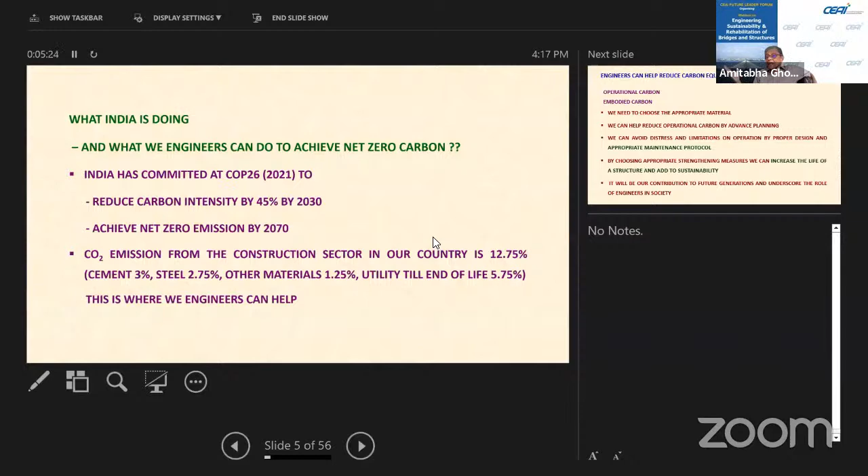In the construction field, we all know that the construction sector in our country contributes 12.75% of the carbon emission. You can see the breakup. And at least we engineers should be able to help in this area.

How can engineers help? We can help by reducing operational carbon and embodied carbon. Embodied carbon is which goes during the manufacture. Operational carbon is the carbon consumption during the utilization of the facilities. Now, to achieve this, we have got to choose a material which will have less embodied carbon. We have to plan such that the operational carbon, or consumption and emission of carbon dioxide, is reduced by better utilization of the facilities.

We can avoid distress and limitations on operation by proper design and, more importantly, the appropriate maintenance protocol. We make something, we design something, but we don't guide how to maintain it. What are the importance of maintenance? It is, after all, we engineers who are responsible to ensure that the structure we build is properly maintained. And then, when a structure shows signs of deterioration, it is we engineers who can increase the life of a structure and add to its sustainability.

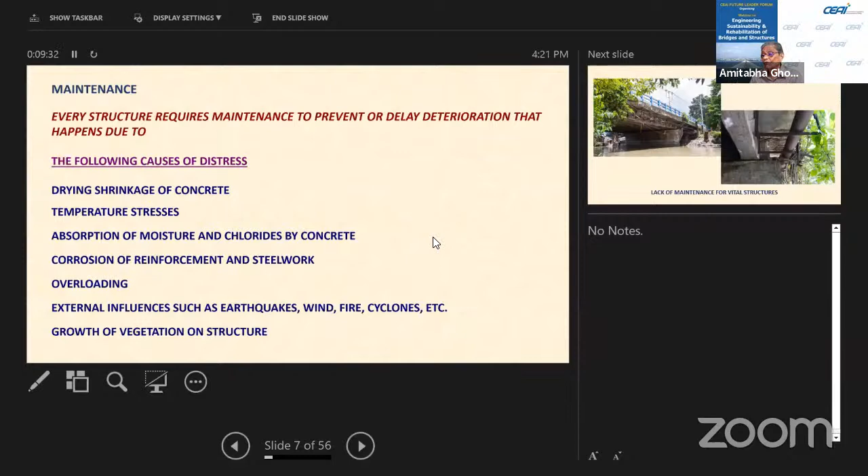What you are looking at is a running bridge. People are crossing. All types of transportation vehicles, including passenger vehicles and goods vehicles, are running over it. And people are very happy it's a good bridge and it is providing them means for transportation. But hardly anybody goes underneath the bridge. And if you look underneath, look at the vegetation on the right-hand picture.

You can see that the pipeline is being supported on the stem of a peepal tree which has grown through cracks in the structure - some seeds have dropped and a tree has grown, and nobody is taking care of it. In the process, it is not only corroding the structures, it is also causing spalling of concrete, exposing the reinforcement.

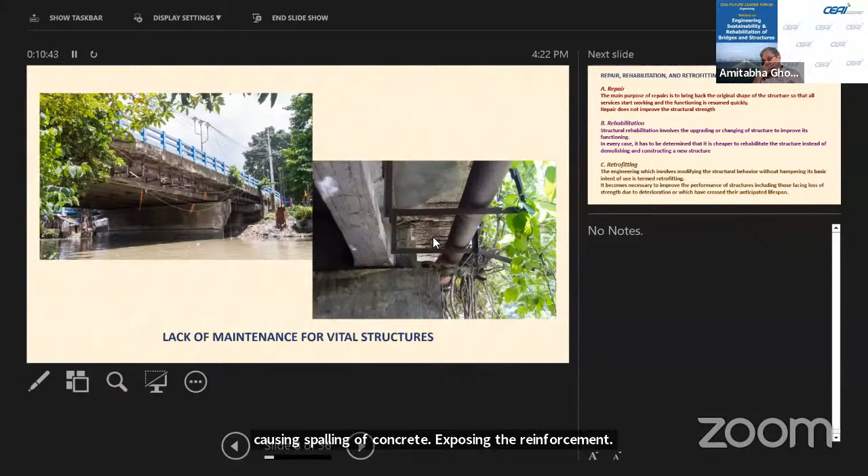And you can see people living in the left-hand picture. There are people living under the bridge. They are having their day-to-day course there - they are cooking there, they are putting fire there. And all that is deteriorating a structure which we have built for 100 years, and which we expect to survive for 100 years. But how can it survive if we do not take responsibility for its maintenance?

Now, in terms of recovery or strengthening of a structure, there are three stages which we talk of. One is repair. When we find that a structure has deteriorated, we try to repair it, to bring it back to its original shape and original strength, so that its functioning is not impaired. Repair is not for improving the structural strength, but for bringing it back to its original design situation.

Now, the other thing is rehabilitation. When we find that normal repair would not do for it, you have got to upgrade or change the structure to bring back its original functioning. But when we do a rehabilitation, we have got to be sure that the rehabilitation measures will not be costlier than building a new structure.

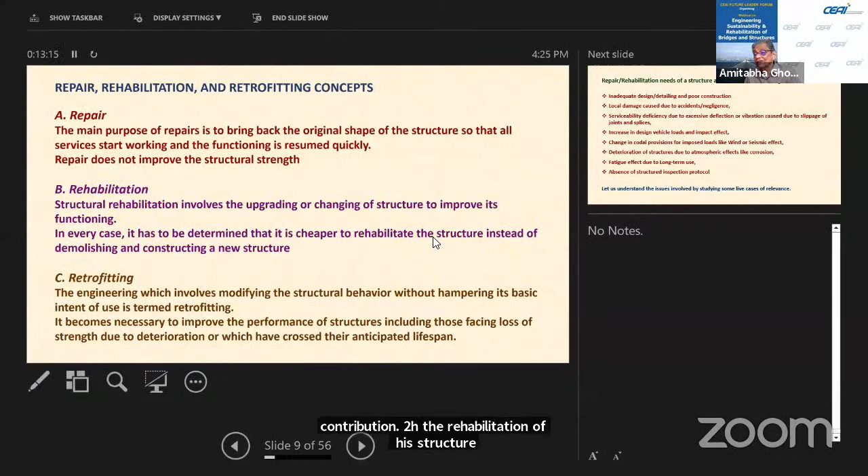Now, all these are the engineer's contribution towards the rehabilitation of a structure. And it is that by which we can contribute towards sustainability. I shall try to share with you what are the reasons for these needs for repair, rehabilitation, or retrofit.

One, it could be inadequate design or detailing and poor construction, even when the structure is made. It is not unusual with our tendering system, our emphasis on least cost, that people willingly or unwillingly try to keep the structure under-designed. And with quality of construction being sacrificed, it can ultimately cause deterioration of a structure.

Then there is local damage, which can be caused due to accident, negligence, or some sort of unexpected happening. There is serviceability deficiency in a structure due to excessive deflection or vibration, caused by slippage of the joints and splices. It gradually starts vibrating and people become scared of using the structure, so they underuse it and thereby reduce its effectiveness.

There could be an increase in design vehicle loads, as I was mentioning. There is improvement in the automobile industry, and they are making vehicles carry more load, making it more economical. But they naturally cannot think about the structures. It is our responsibility to check whether the structure we have built, the structure giving us service today, will still be safe or unsafe. And we should know about the impact. Very often there's a bump in a structure that gives more impact, and continuous application of such impact impairs the load carrying capacity of a structure.

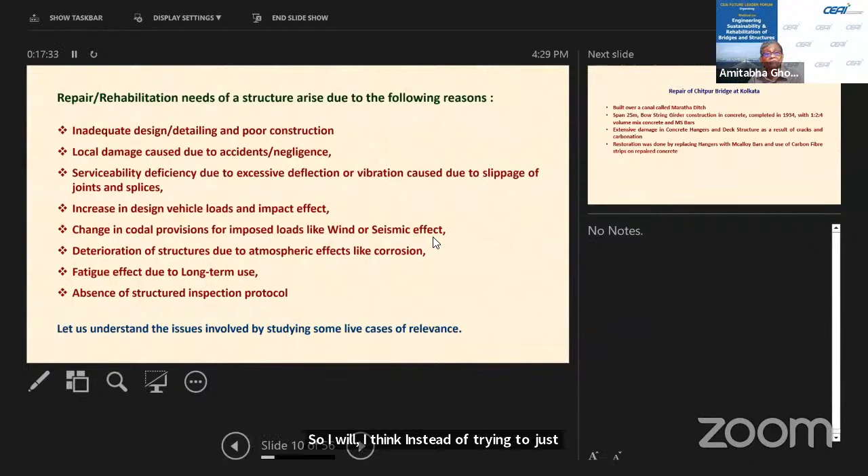We would try to understand, and I would try to share with you my understanding of these issues through some case studies: one involving repair, another involving rehabilitation, and the third involving retrofitting. So instead of just lecturing with dry facts, let us share some of our experiences.

The first one I am going to talk about is involved in the eastern region, in the city where I live. This was in Calcutta. There is a bowstring bridge across a canal. The canal, interestingly, is called Maratha Ditch because the Britishers had built it to keep away the Marathas, who used to come all the way from the west to maraud and loot the wealth of the people living here.

It has a 25-meter span bowstring girder, constructed in concrete, completed in 1934, with nominal mix 1 to 2 to 4 mix concrete and MS bars. We have had this structure now for almost 80, or more than that, 90 years.

This has shown some damage in the concrete hangers and deck structures, which came to light through a special inspection done of the bridge. Restoration was done by replacing the hangers with McAlloy bars and use of carbon fiber strips on repaired concrete. I'll just share the case.

As you know, the bowstring girder is one of the classical structures used for reducing the depth of the deck so that the formation level can be kept low, while still providing clearance from the underlying water. If we can keep the depth low, we require less grading in the approaches. It's a pure structure because it takes compression in the top chord and tension in the bottom chord, with very little bending in the structure. The verticals are hangers which hold the deck.

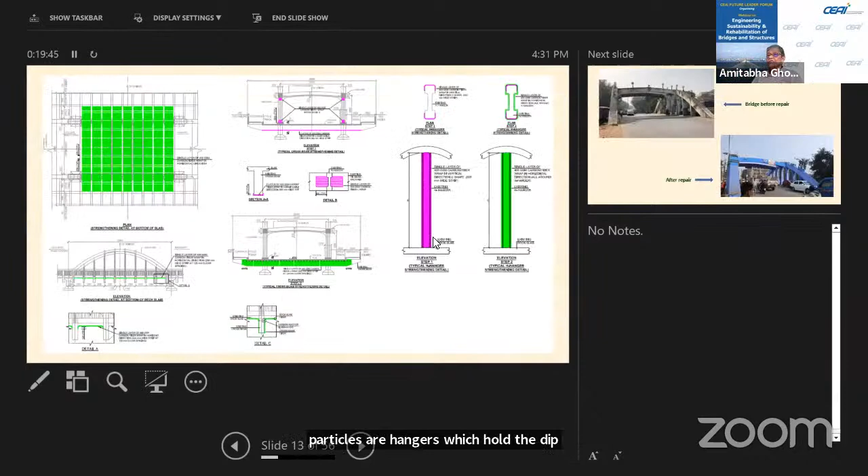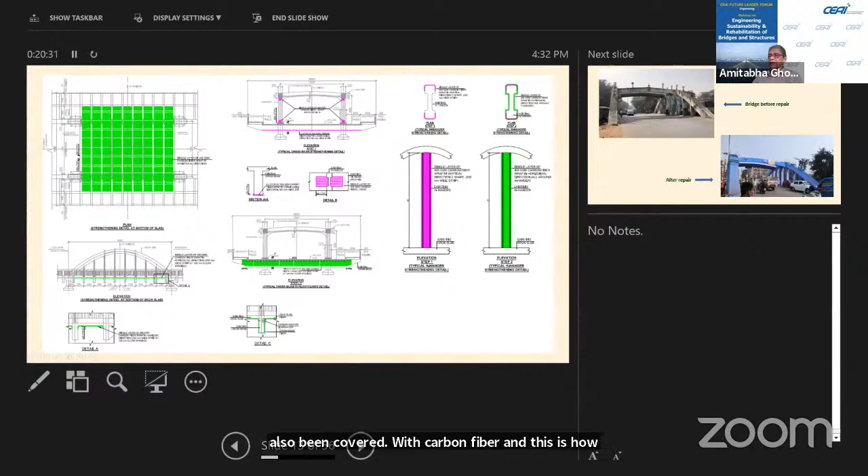Whatever is shown in green is what was proposed to be used with carbon fiber. Here we show further details. The underside of the deck has been treated with carbon fiber ultimately. On the right side, the hangers, the vertical hangers, are dumbbell shaped, and these have also been covered with carbon fiber. This is how the hanger is hanging, and the underside of the deck you can see in green here, showing the entire structure.

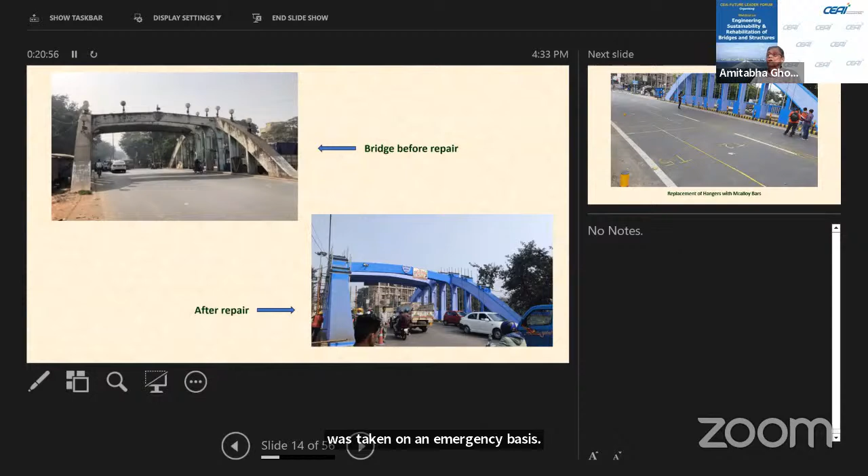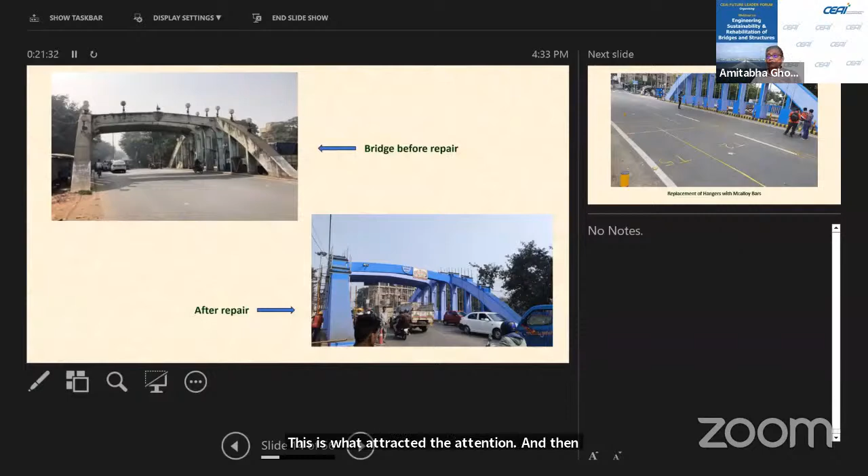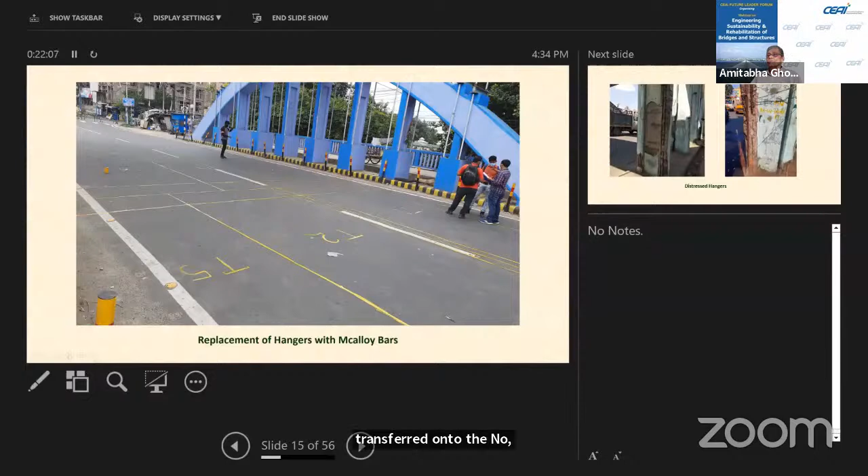And therefore there had been damage and spalling of concrete in the verticals. This is what attracted attention, and then we did inspection of the underside and took up the repair work. You can see the verticals have been replaced by McAlloy bars. Each vertical has been replaced with 4 McAlloy bars, placed on the top of the rib, such that the vertical load is transferred onto the top rib, then connected to the bottom, lifted, and fixed with nuts.

Now this is the quality of damage which was found. You can see the reinforcements are fully exposed. These are the mild steel bars, fully exposed and in a condition where they will just deteriorate, and the bridge was ready for sudden failure.

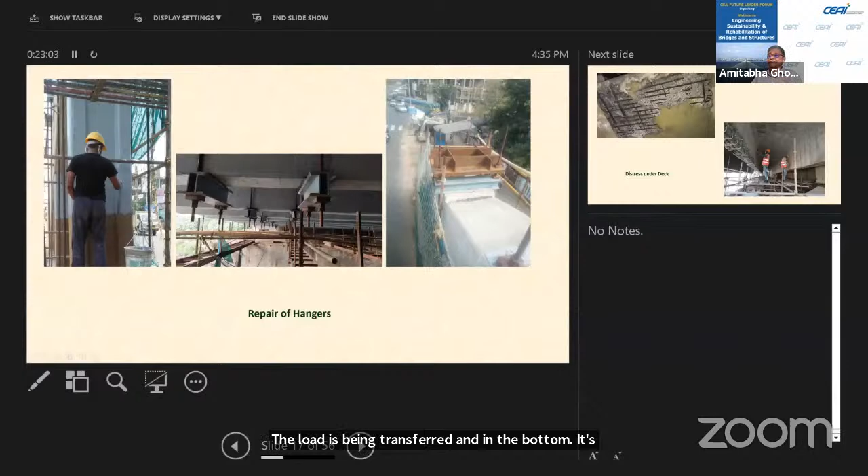This is how repair is being done with micro concrete for the damages which were there. As I said, McAlloy bars are put on the top rib arch, and with a steel plate, the load is being transferred. At the bottom, with a threading arrangement and nuts, the tension from the hangers is being transferred to the new bars which have been put in.

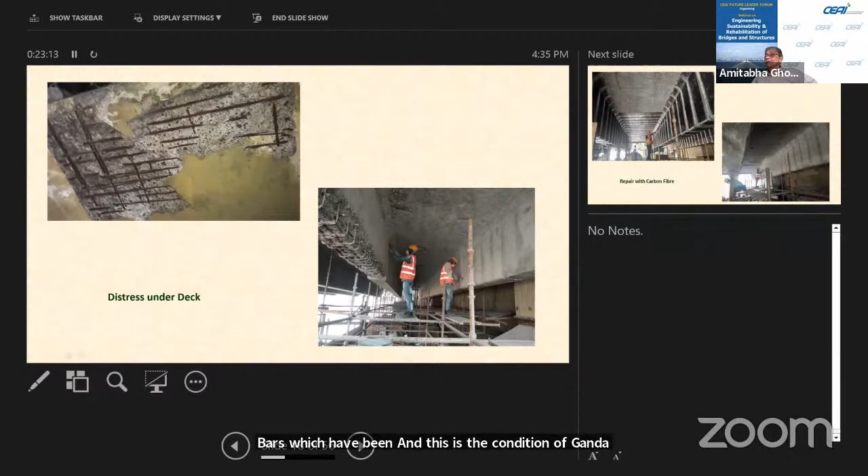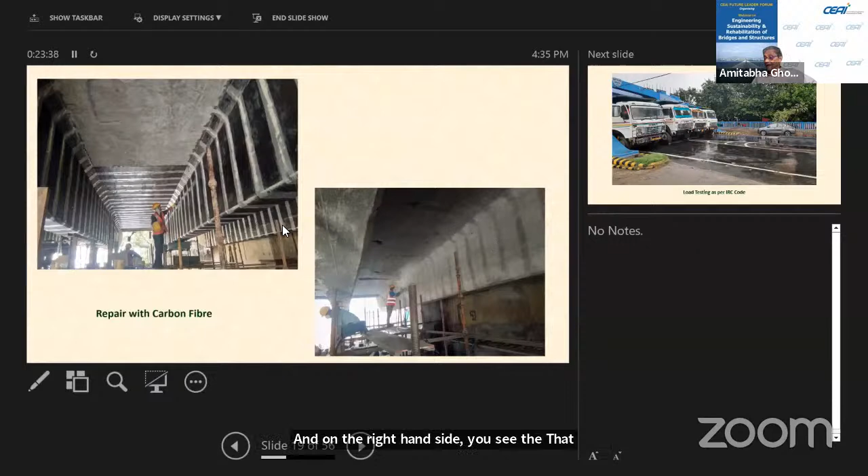This is the condition of the underside. You can see the slab bottom, the bottom of the beams of the deck, and all that had to be cleaned and new concrete put in. Then carbon fiber is being applied onto them, alternately, and then fully covered. On the right-hand side, you see the carbon fiber covered with plaster, and the repairing is complete. This is the load testing being done, and it was found to be in good shape.

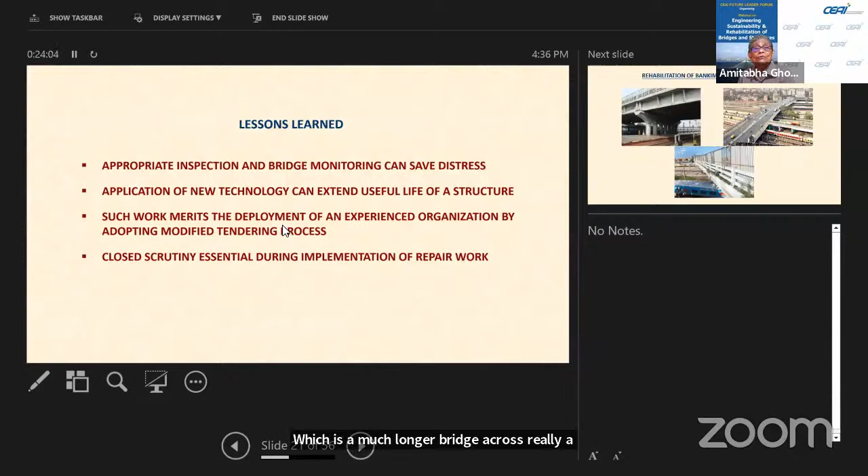The bridge was in good shape. By repairing it on an emergency basis, not only did we extend the life of this bridge, but there was a major repair going on in an upstream bridge, a much longer bridge across the railway yard, and that repair could not be taken up unless traffic could be diverted onto this bridge. It carried all the traffic and thereby allowed that other major repair to be completed.

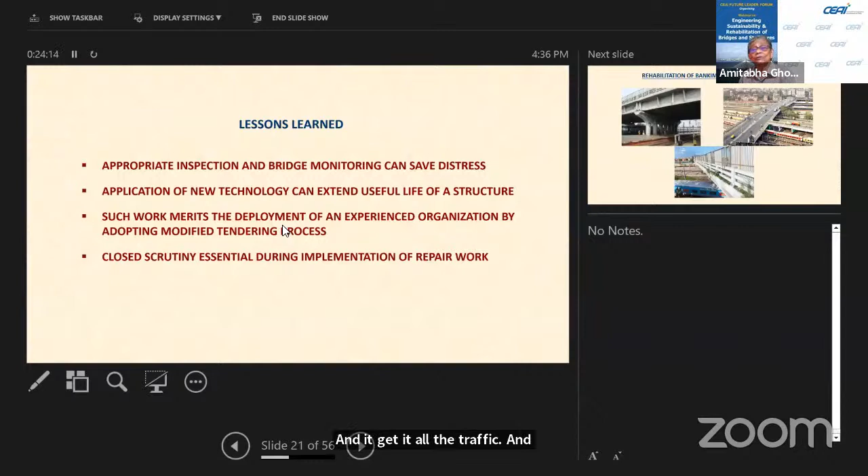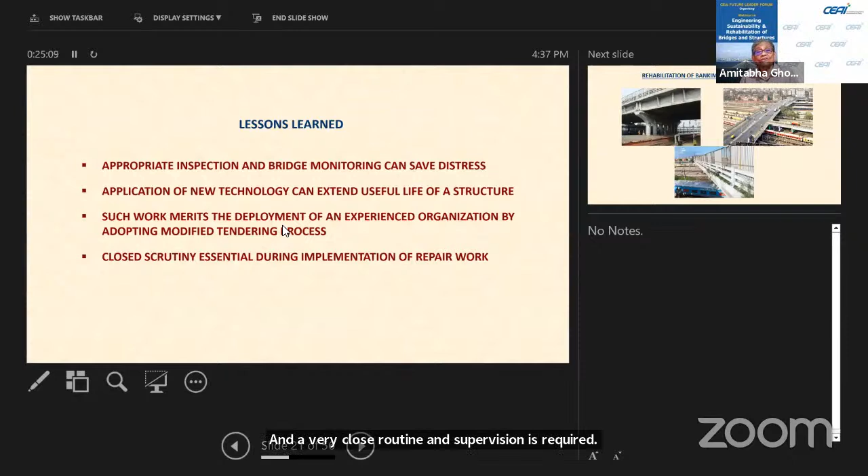Now, what are the lessons learned? As usual, appropriate inspection and bridge monitoring can save distress. A lesson we have been taught, but we have not learned. Application of new technology like carbon fiber, application of Macalloy bars, pre-tensioning them and thereby taking the load off an old structure can give it new life. But one caution: such specialist work should be done by experienced organizations, not by ordinary tendering and giving it to the lowest bidder. One should be cautious about that as an engineer, and very close scrutiny and supervision is required during implementation of the repair work. I move to the next case.

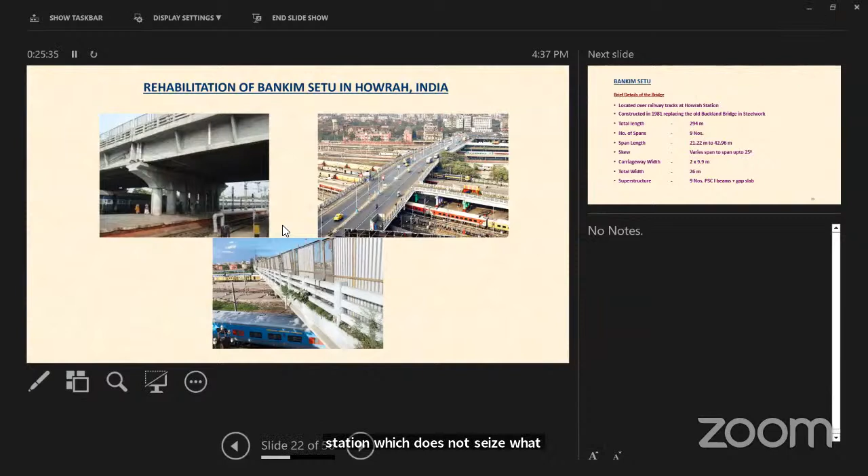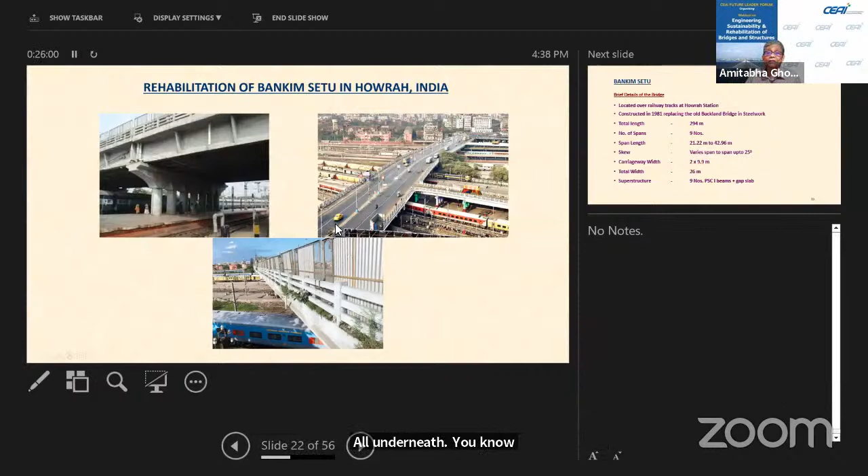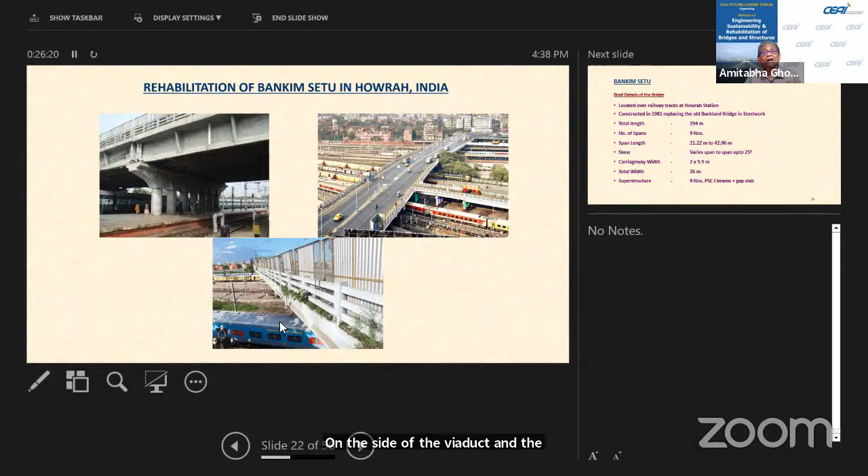It's a bridge across the Howrah station. Howrah station has more than 20, 24 platforms to be exact, and it is a station which does not cease working throughout the day. It's hardly 4 hours at night that there is respite from trains moving in and out. Since this railway track divides the city, the only link between Calcutta and Howrah is over this deck. As you can see, traffic is moving on this, and underneath you can see the trains, either stationary, loading passengers or leaving. The gap between the underside of the bridge, the viaduct, and the high tension wire which runs the electrical trains is hardly 60 centimeters. So there is no place at all for going underneath or repairing them.

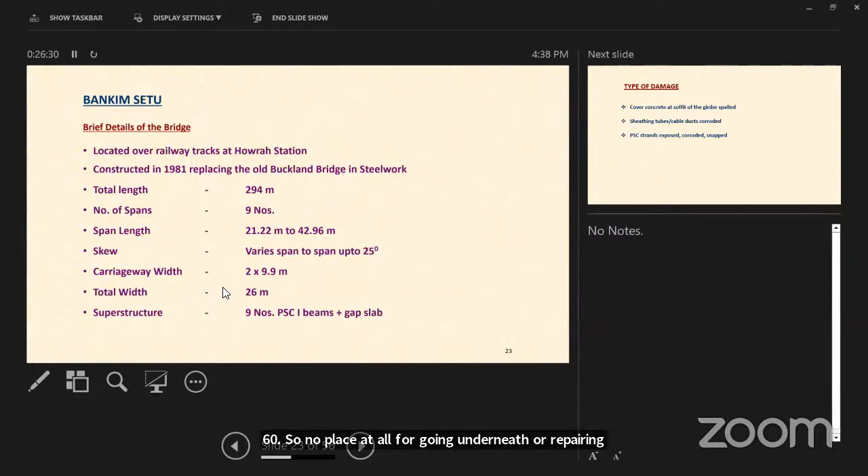Is there somebody talking? Hello? Hello? Okay.

Well, some brief particulars about the Bankim Setu, as we call it. It's about 300 meters long, 9 spans. Spans vary from 21 meters to 42 meters. The carriageway is 9.9 meters, a 6-lane carriageway. And the superstructure is composed of 9 PSC beams and a gap slab.

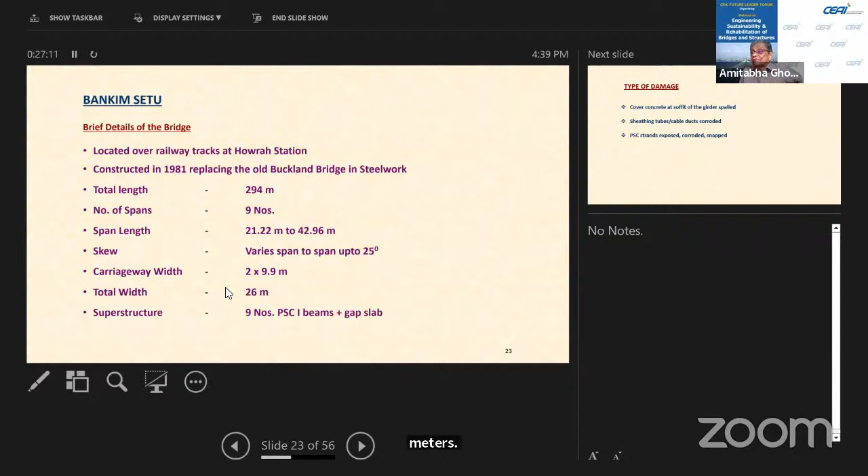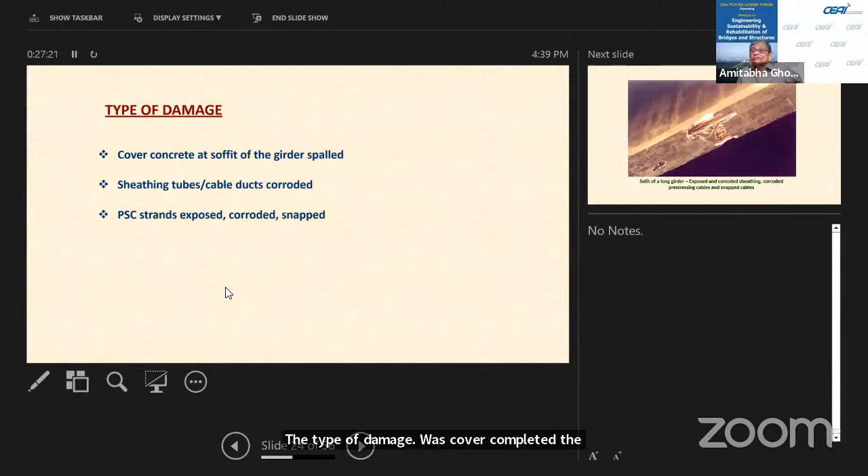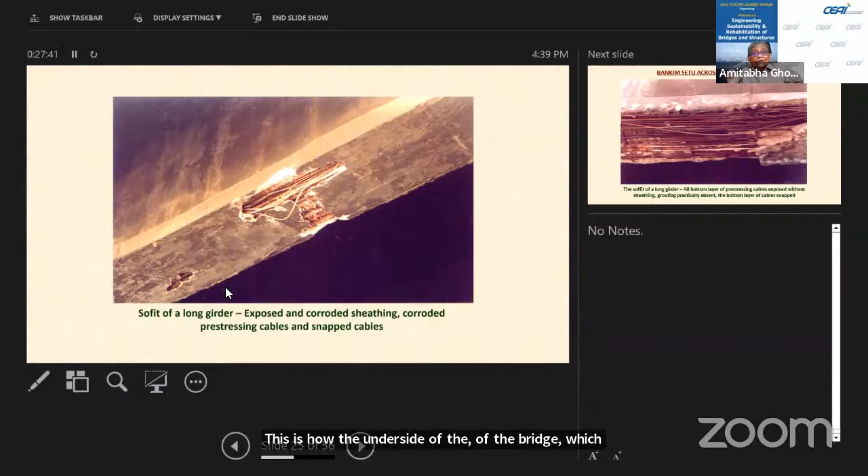The type of damage was cover concrete at the soffit of the girders had spalled. It is a PSC bridge; PSC precast girders were cast and put in place. The sheathing tubes and the cable ducts were corroded. The PSC strands were exposed, corroded, and snapped. This is how the underside of a girder of the bridge, which carries continuous traffic day and night, started. You can see the concrete is just falling off. It does not look like concrete; it looks more like plaster.

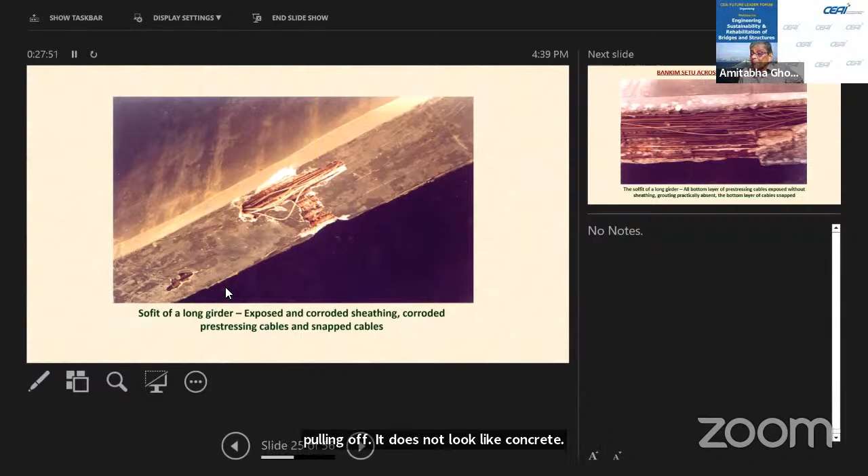And this is the next stage: all the plaster has gone away and the pre-stressing wires are hanging like this. Mind you, this is in a city where it is under the view of thousands or millions of people using the station. If they look up, they can see the condition of the girder, and still it remained like this without any repair for a very, very long time. All the bottom layer of prestressing cables are exposed without sheathing, grouting is practically absent, and the bottom layer of cable has snapped.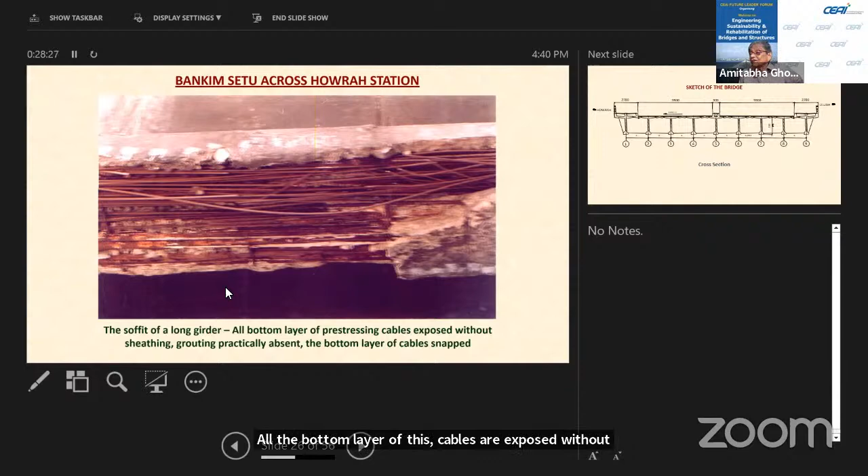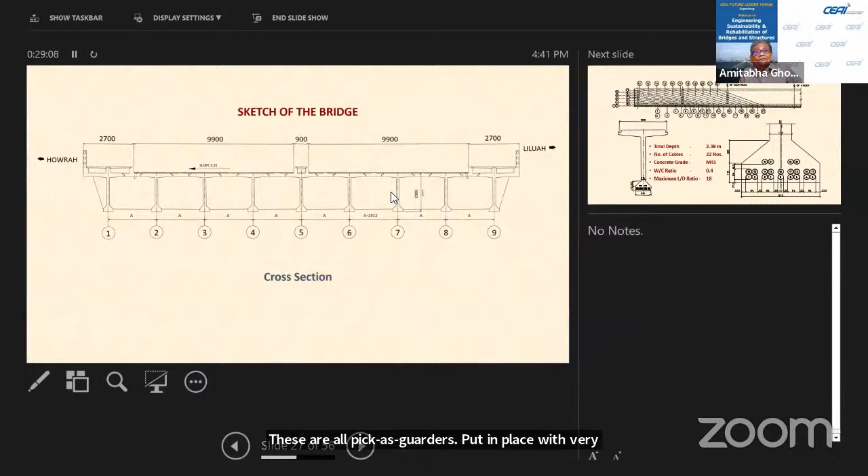I don't know how well you can see, but these are the 9 precast PSC girders with a bit of gap slab, 9 girders placed side by side, very short girders so that the formation level could be low. This is how the bridge had been designed. It's an excellent design, but the only thing is the designers did not think about the maintenance part of it. These are all precast girders put in place with very little gap between the ends of the girders, so you could never go and see the end of the girder, how the pre-stressing anchors are there. This is the cross section of the girder.

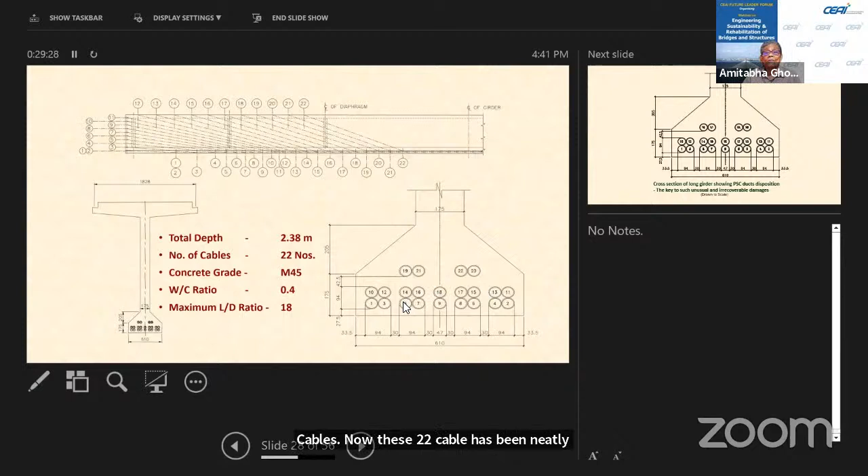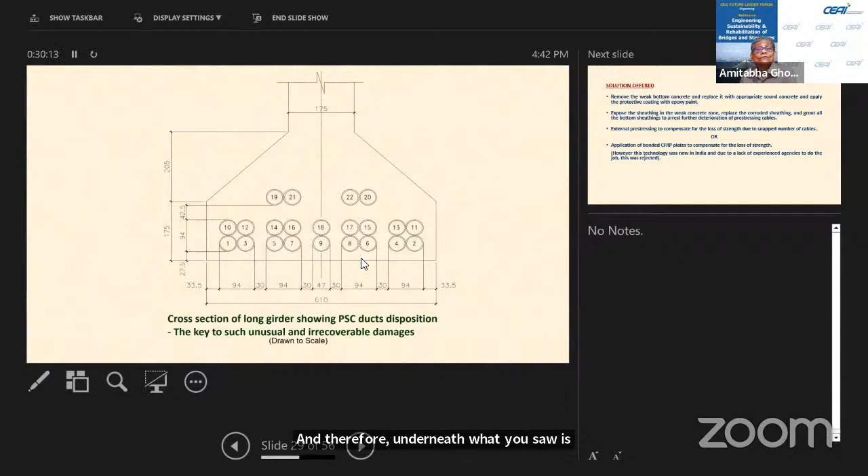You can see there are 22 cables. Now these 22 cables have been neatly arranged, but the only problem was that the gap between the cables was hardly 30 millimeters. For a girder which is almost 2 meters deep, 2.4 meters deep, the concrete is poured from the top in an encased shuttering. When the concrete reaches here with a 30 millimeter gap, the concrete does not flow. What has flowed is just the plaster, a sand cement slurry has gone in. The concrete stone chips have formed neat arches, and therefore underneath, what you saw is more of a thin layer of plaster rather than concrete. That has caused the decay of this bridge in hardly 20 years' time after it was built.

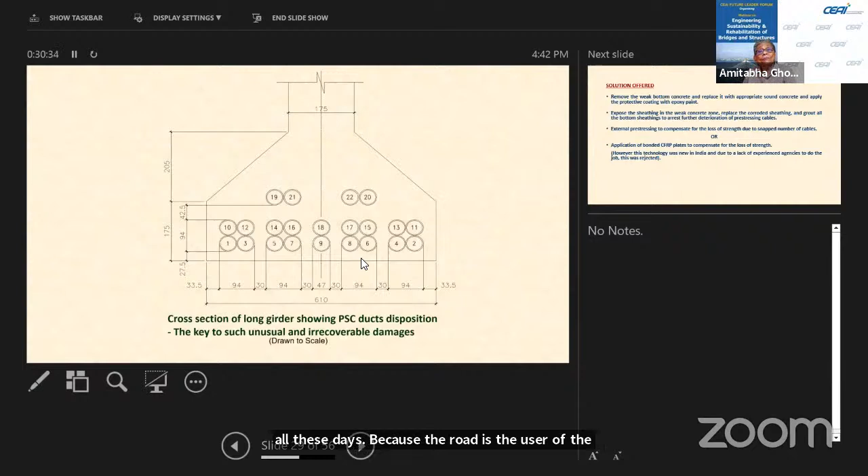And all these days, because the road was the user of the bridge and the railway was the upkeeper of the bridge, none of them looked at the condition of the girders. Now the solution which was offered was to remove the concrete, replace it with micro concrete, expose the sheathings in the weak concrete zone, replace the corroded sheathing, grout all the bottom sheathing, and then apply external pre-stressing.

The only other way was use of carbon fiber, but in those days, in 2000, carbon fiber was not that popular, nor was the technology well understood. That is why what we took recourse to is external pre-stressing.

Mind you, there are only 4 hours of stoppage time. During these 4 hours, work had to be done if you have to go underneath, because otherwise, with 25,000 volt, nobody will survive. So the repair could not be done underside very safely, and that is why external pre-stressing was done.

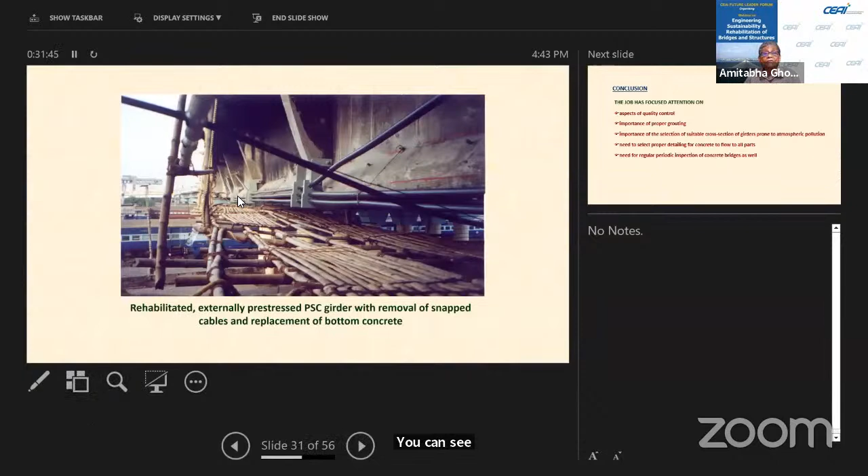You can see the pre-stressing cables which are being taken and embedded. They are being passed through steel members which have been embedded in the concrete, and through them the pre-stressing cables have been brought.

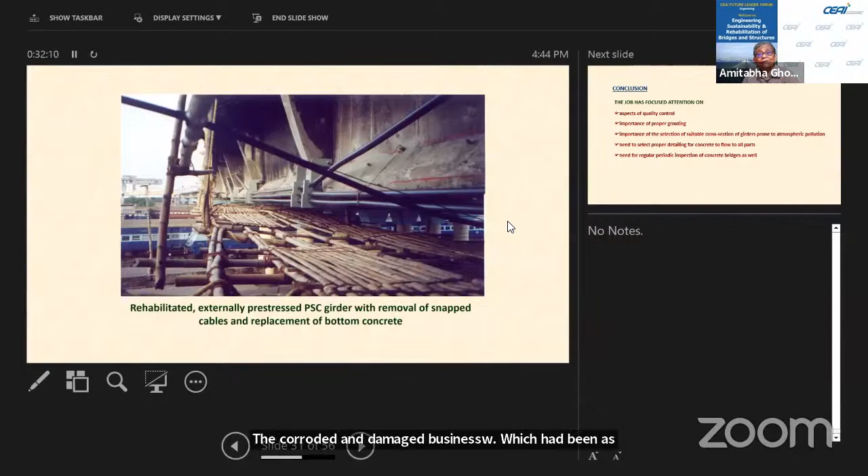They were pre-stressed to replace the corroded and damaged pre-stressed wires which had been, as you saw, converted into sort of like old electrical wires hanging. With this pre-stressing, the girders were replaced or restored, and the engineers, after doing the job, gave the assurance that with this sort of a repair, it will live for another 20 years maybe, but you have got to look for a permanent replacement.

The work was done in 2001. Now in 2023, railway has started thinking of replacing the girder with a new bridge, but it has gained a time of 23 years and delayed the new construction by 23 years. And that is our contribution to the sustainability.

The conclusion, or the awareness which came, again, quality control, which was poor. Even a wrong design is a poor quality control. Where you do not leave space for the concrete to flow is poor quality. The importance of proper grouting obviously was not emphasized.

The cross-section of the girder which had been selected, in an area which is prone to atmospheric pollution, because thousands of trains are coming in and going out, the dust and the diesel and fumes and all sorts of pollution that comes with huge movement of people were not thought of. The detailing was not proper, and unfortunately, there was no periodic inspection and reporting.

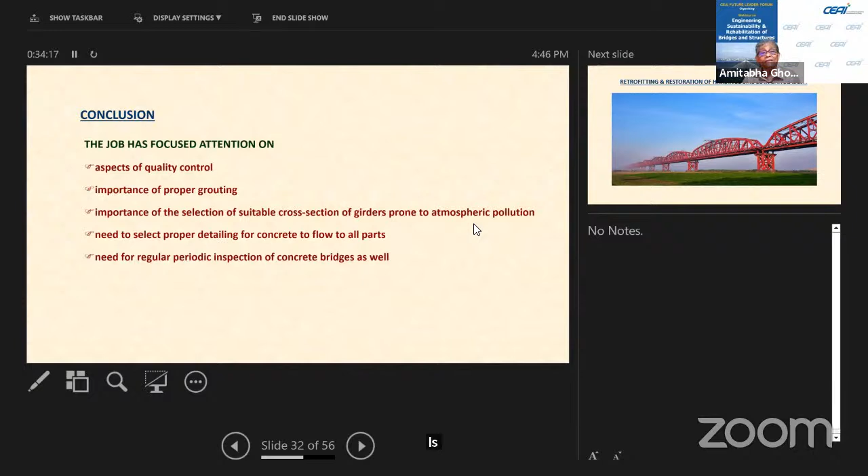The third project I will take up of retrofitting, it's an old job, classical engineering job, but I am always proud to talk about this job because it is one of the finest examples of work done by Indian engineers in a foreign country.

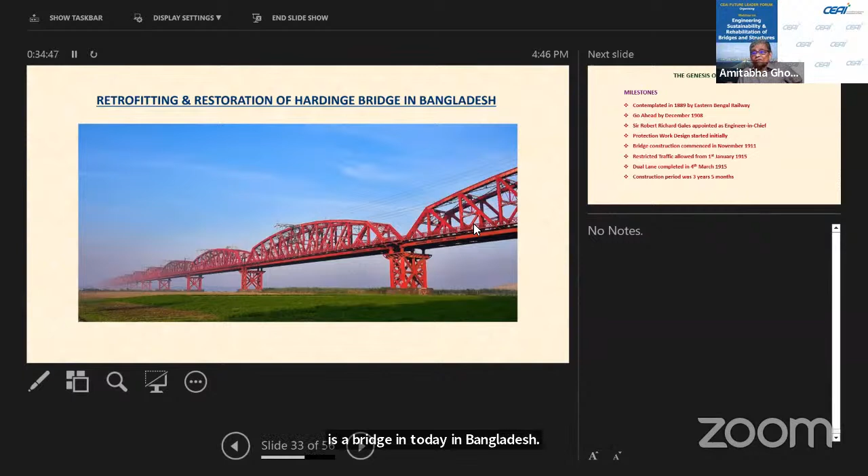What you see is a bridge today in Bangladesh. At the time it was damaged, it was in Pakistan, East Pakistan. This is a bridge across Ganga, the main Ganga or Padma as they call it. It's a long bridge and it carries 2 lanes of broad gauge railway, the only bridge across the river for railway in that country.

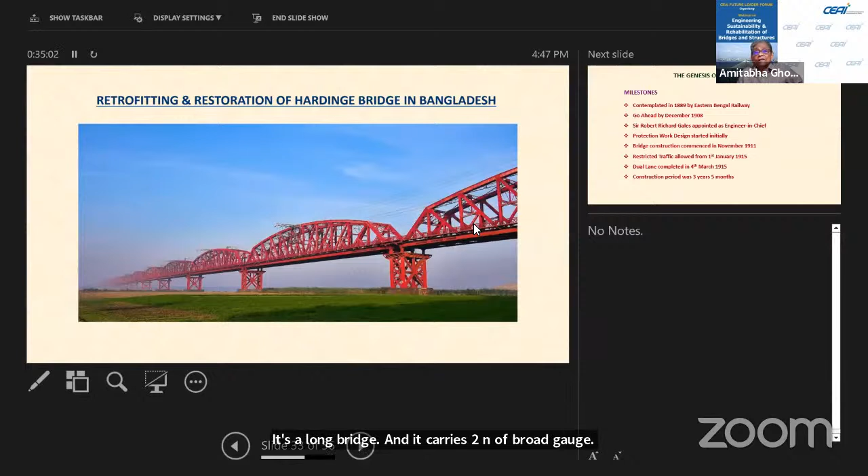Bridge had been contemplated in the 19th century, 1889, and was completed. Construction was completed in 1915. After it was started, go-ahead was given in December 1908. Those were the days of bridge builders.

Sir Robert Gales, who was the engineer-in-chief, he was the bridge builder. He was responsible for everything from design, planning, construction, look after his workmen, to get the proper workmen, to select the proper tools. Everything was done by him.

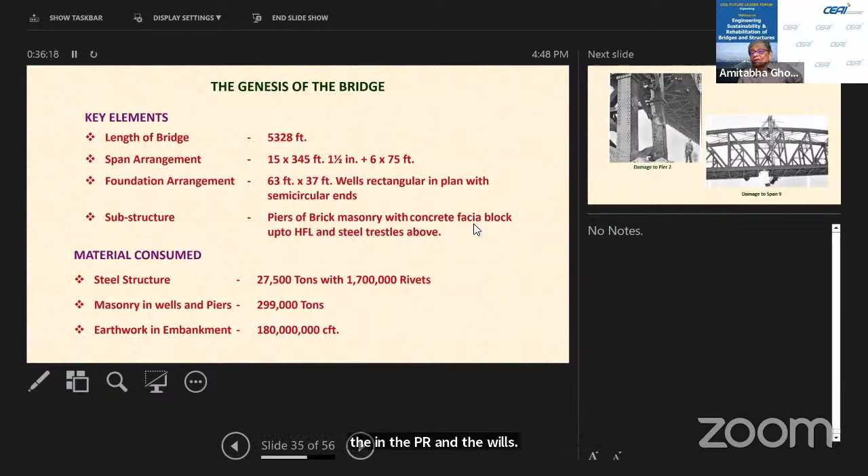It was completed in 1915, one of the finest examples of long span girders. These are 300 and more than 100-meter girders, 345 feet to be exact, and it's more than a mile long. It consumed 27,000 tons of steelwork and some 300,000 tons of masonry in the piers and the wells. It was all done in brick masonry with concrete fascia block.

This bridge got damaged during the brief 1971 war between India and Pakistan, when India tried to help the population in East Pakistan. In this process, Bangladesh was born, but the bridge was the casualty. There are 4 damages. One of the piers were damaged, but these are steel columns filled with concrete, and it is that concrete which saved the pier from collapsing.

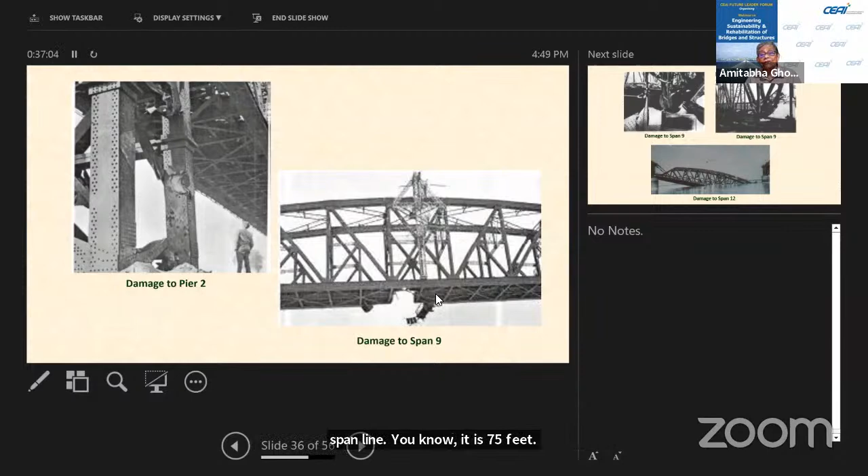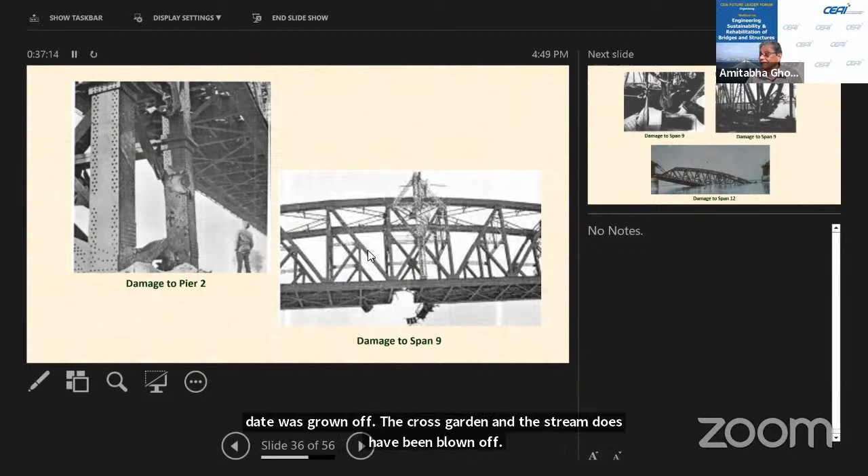You can see the right-hand side, the damage to span 9. It is 75 feet, or about 23 meters, of bottom chord was blown off. The deck was blown off. The cross girder and the stringers have been blown off, and the bridge had tilted and sunk. You can see more detailed situation, how the bottom chord has been buckled.

I'm sorry for the poor quality of pictures. I had to take them in a Brownie camera with which I visited. And then there are the diagonals and the verticals which were damaged.

There's another span which had been dislodged with dynamite and fallen down. I will not talk about that. But this span 9 was important because if a span has fallen, you have to replace it. But if a span is damaged, you can still try to restore it. And that is what was done.

Now, this bridge had a significance more than just a railway bridge. Because for the newly formed Bangladesh government, the head of state made a personal and passionate request that the bridge should be restored very quickly, because Bangladesh had only one product which it could export and earn from the international market, and that was jute.

The jute had to be exported through the Mangla port, which was on the western side of the river, and jute is grown on the other side, the eastern side. Only if this bridge is restored can jute be taken to the port and exported across the world, and Bangladesh can earn some well-deserved honorable foreign exchange. Bangladesh was living on doles and on grants and credits given by various agencies and countries.

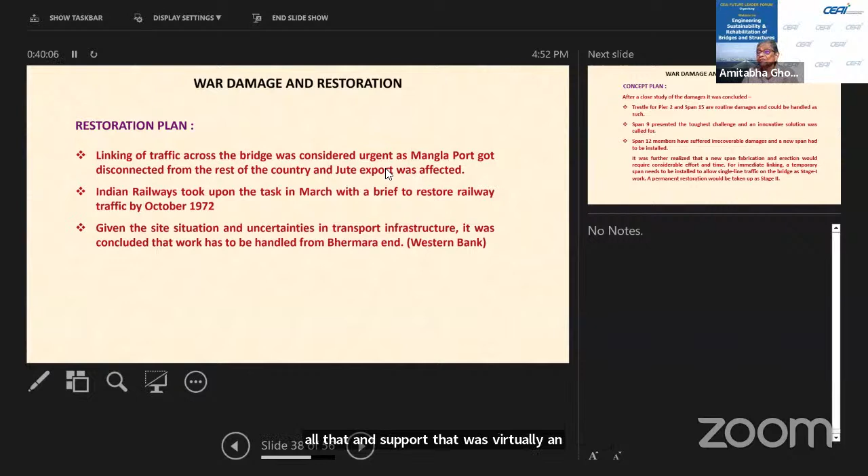But Indian engineers took up the challenge and decided that the trestles for the piers could be repaired easily. Span 12, which had suffered and fallen down in the river, had to be removed, and a temporary span had to be put in place. That was also decided, and for that, some ongoing bridge spans were taken from India.

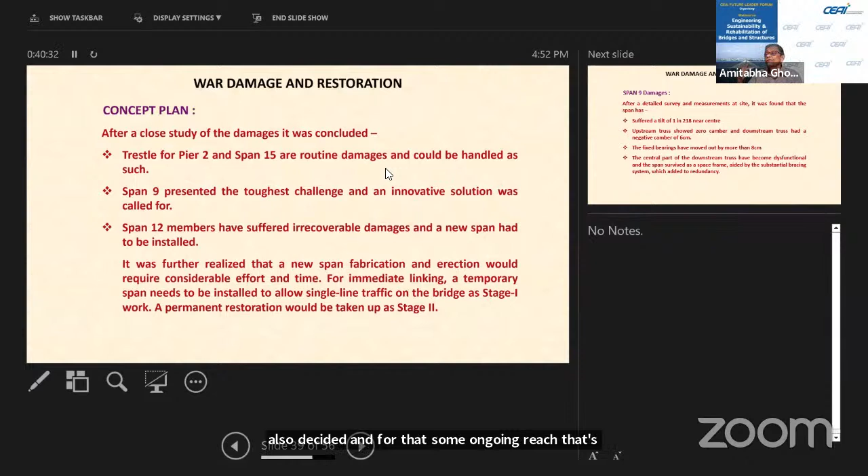But it is span 9 which presented the toughest challenge - a span which has deflected and tilted. The bearings have been dislodged. The upstream truss showed 0 camber, and the downstream truss had a negative camber of 6 centimeters. It was not even known.

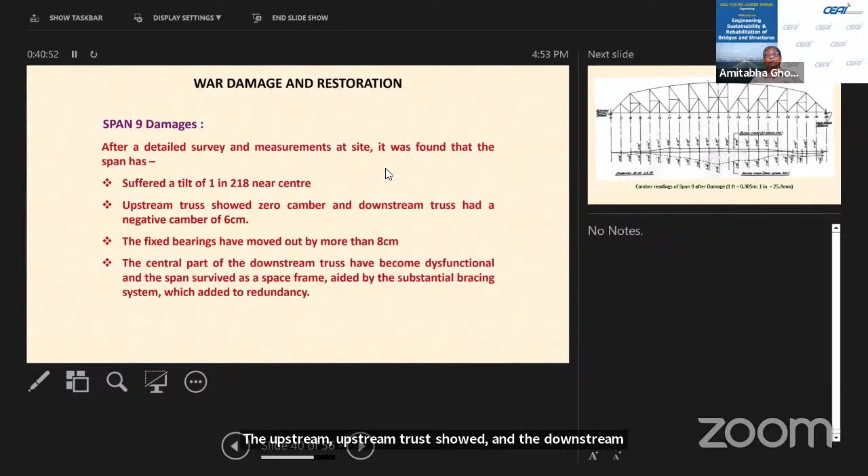This is the schematic view of the girder. What you see here in the dotted line is the damaged side camber, and what you see on the other side is the good side camber.

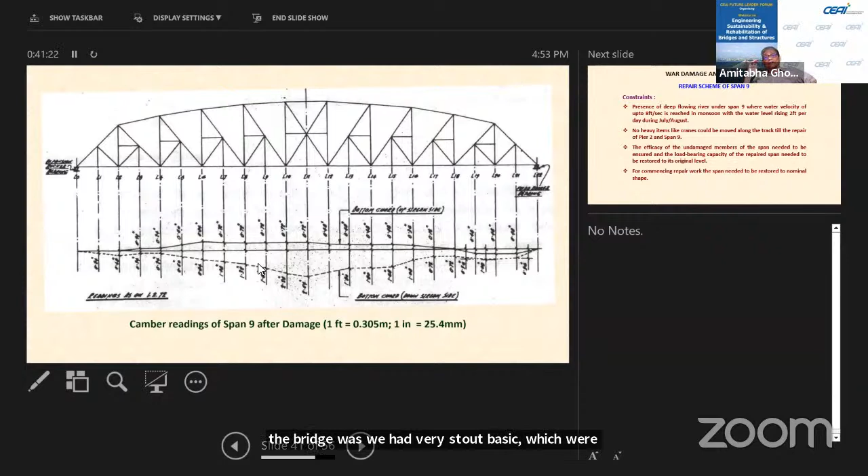The only positive thing about the bridge was it had very stout bracing, which were redundant - top chord bracings that were intact and very, very strong, along with sway bracing. So one side truss was holding the other side truss; you can consider it more as a cantilever through those bracings and the portals. That is how - but it was not known whether the members were safe, whether they had crossed the elastic limit or gone to the plastic limit, in which case you cannot use them as a bridge.

In those days, in 1972, India had only one mainframe computer, at IIT Kanpur, and getting time in those computer centers was very difficult. A 1.5 hour slot was given at night, 2 o'clock, and we had to go and do the analysis of the as-is structure, considering all these members removed. And it was found to our relief that no member had crossed the elastic limit, and therefore one could really try to restore it.

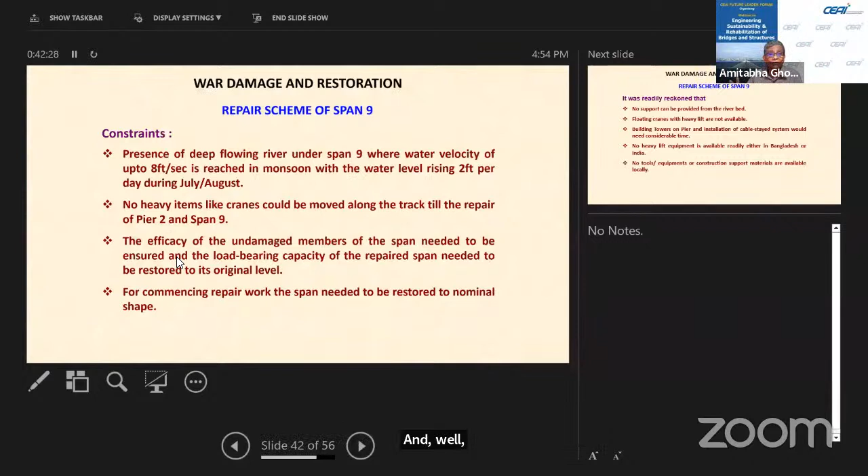Well, I think I'm still within time. Another 10 minutes I have, I suppose. Yes, sir. Okay, now what are the constraints?

The river was very deep, more than 60 feet in monsoon, and the river water was flowing at 2.5 meters per second. Water rises 60 centimeters every day during the months of June, July and August. The hydrograph showed that. No heavy items like cranes could be moved along the track until this repair was done.

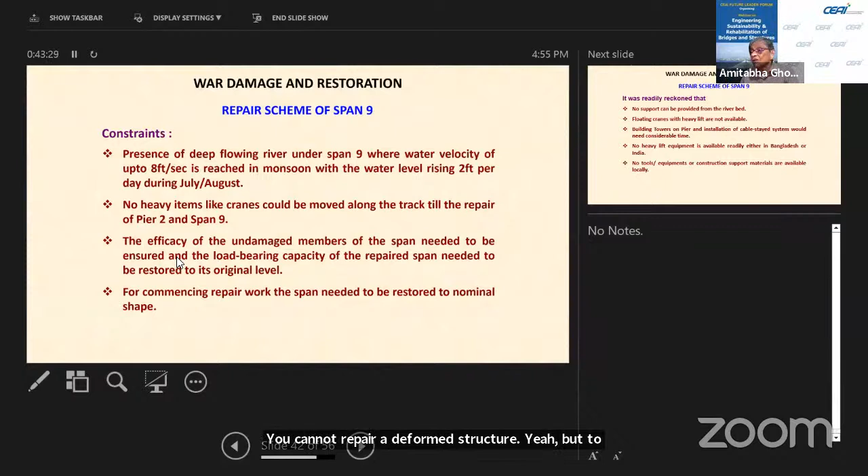The efficacy of the undamaged members was proved, and for commencing repair work, the span needed to be restored to its nominal shape. You cannot repair a deformed structure - you have got to bring it back to its original shape before you can undertake any repair work. So that was the biggest challenge. No support could be provided from the river bed because it was 40 feet of water, and then there was silt.

No floating cranes were available which could lift the span. The cable stayed system, if we put a tower on a pier and pull cables up, was not possible because that would require a very long time. No heavy lift equipment was available in India or Bangladesh. If we had a floating crane with a huge capacity, it could have helped, but it was not there.

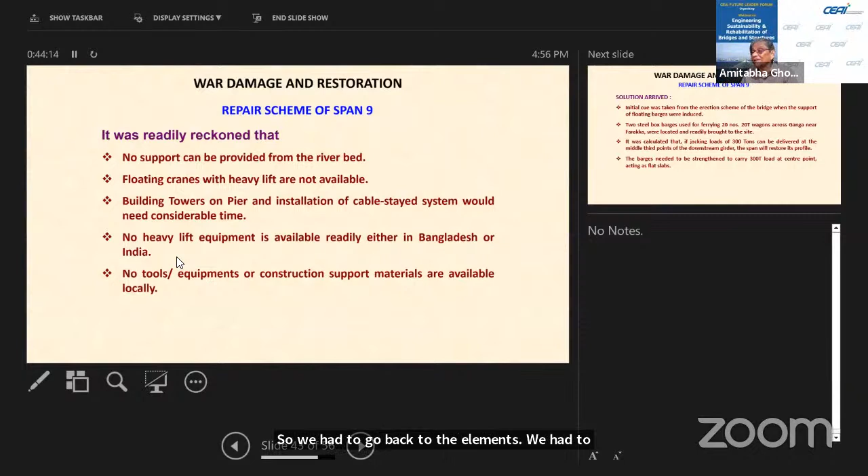So we had to go back to the elements, back to our basic thinking, and it was left to the designers how to do it. We studied the original erection scheme. The bridge had been erected with girders fabricated on the bank, then floated out on barges and put in position. So we thought, why don't we get some barges?

We were fortunate, we got some barges spared by the railway. Farakka barrage had been completed, so these barges, used for ferrying 20-ton wagons, could carry 400-ton loads. Those barges were brought in, and it was found that if we could jack the span at the 1/3 point with 300 tons, the span would come back to its original shape. So that's what we did.

We brought the barge in, and for delivering this 300-ton jacking load, we followed the principles of buoyancy, the Archimedes principle. These barges were steel and hollow inside. So we filled them with water, and if you put it under the span with a strut, then pump out 300 tons of water, it will put a jacking force of 300 tons.

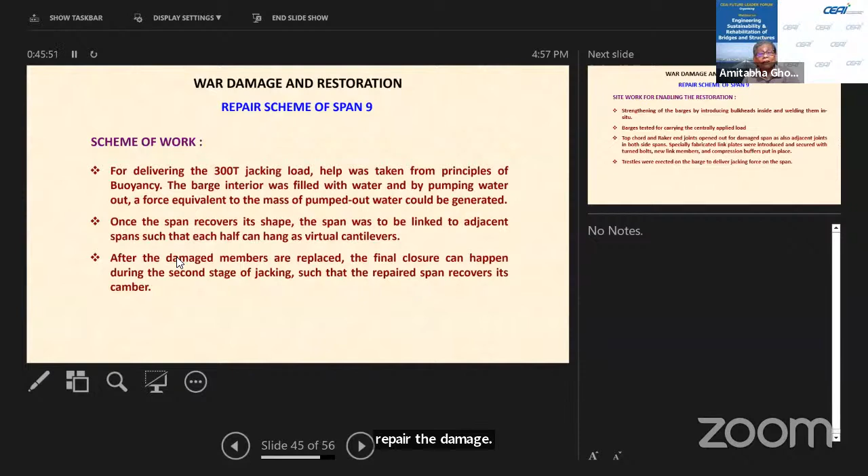Once the span recovers its shape, you can connect it to the adjacent spans, hold it by cantilever, and then repair the damage. This was the scheme of things. It looked rather wild, and the railway did not approve the scheme until the work was completed.

The barges were strengthened by introducing bulkheads inside and welding them in situ. Barges were tested for carrying this centrally applied load. Top chord and raker end joints were opened out for connecting to adjacent spans, and trestles were erected on the barge to deliver the jacking force.

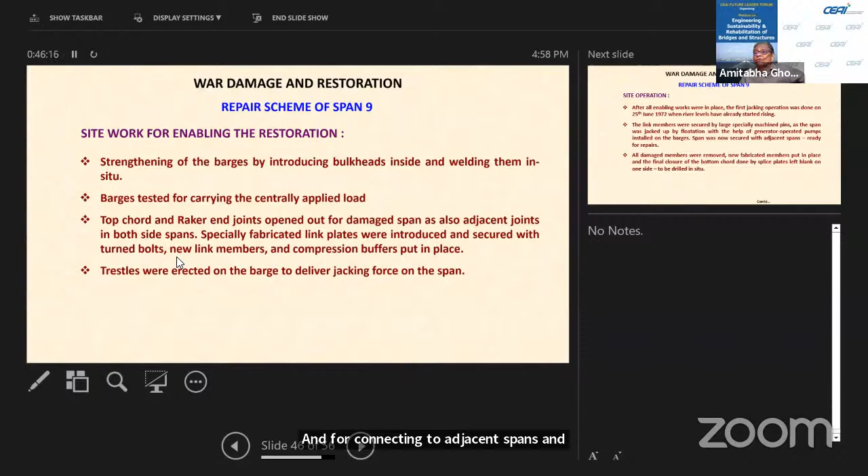After all this work was in place, it was jacked first. So when the river level already started rising, it was connected to the adjacent spans, and then all the damaged members were removed, new fabricated members put in place, and the final closure was done by splicing in situ. I will just show you the scheme.

You see, this is the damaged span. You can see the damages. Two barges which had been strengthened were brought in, and they were anchored in the river bed with cable anchors. Then on those barges, a steel trestle was built up and connected onto the bottom of the girder.

We put two supports at the 1/3 point, then filled up the barge with water and pumped it out so that a 300-ton jacking force is applied, and then we removed all the damaged members. First, before that, we connected it with a tension link and a compressive buffer at the bottom. We connected them to the adjacent spans so that one half of the span is cantilevered from this span, and the other half is cantilevered from the other span.

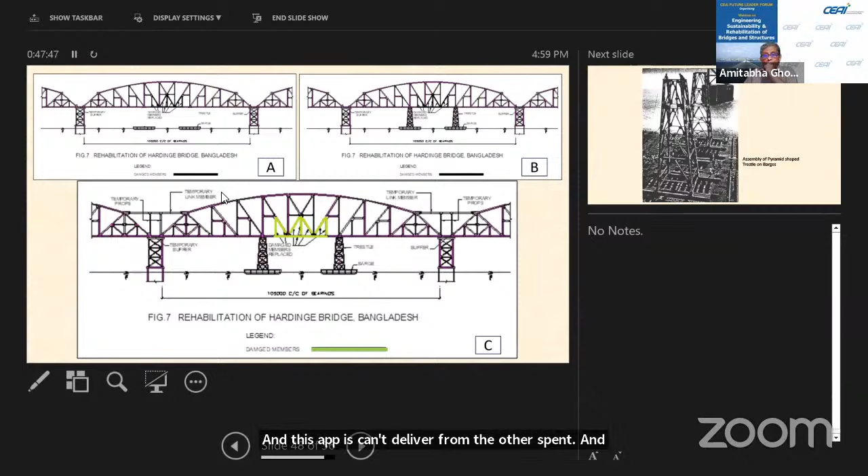And we were free to remove all these members and the repair could be done.

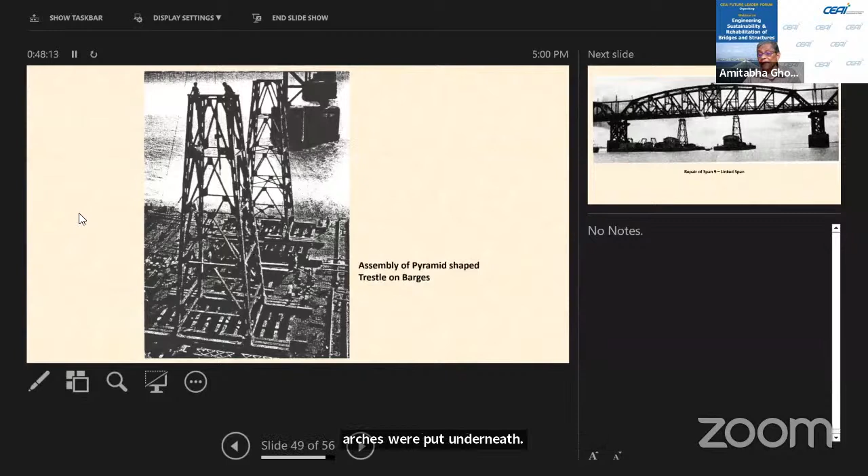Again, apologies for the poor picture. You can see people erecting the trestle on the barge where strengthening has been done, and the barges were put underneath and assembled. There was no electricity, only generators for working, and no communication system, so we worked with handheld megaphones, giving directions to people working in these corners so they could connect it when the span was jacked up.

Now, the first jacking was done and the removal was done, and then the bridge was ready for final repair. But we found that the trestles were now too long because the water had risen by more than 8 feet. So we had to cut down the top part of the trestle, make a new grillage, and once again the span was jacked up and brought to its original position.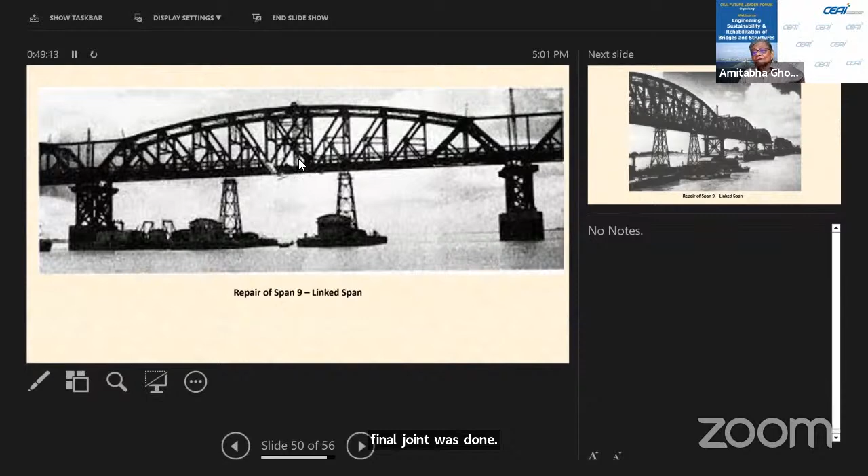Then the final joint was done by making the last splice in situ. And when the span was finally released from the links, we found that it had restored its camber, and our gamble had paid off. Whatever risk we had taken had proved to be okay.

So the work had to be done, as you can understand, because we were working in monsoon and trying to achieve completion by September. So it had to be done day and night, and everybody in the team was contributing towards completion.

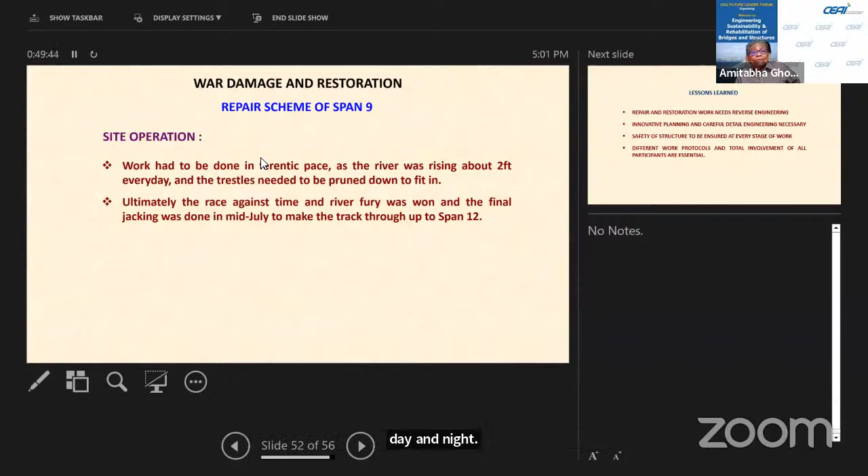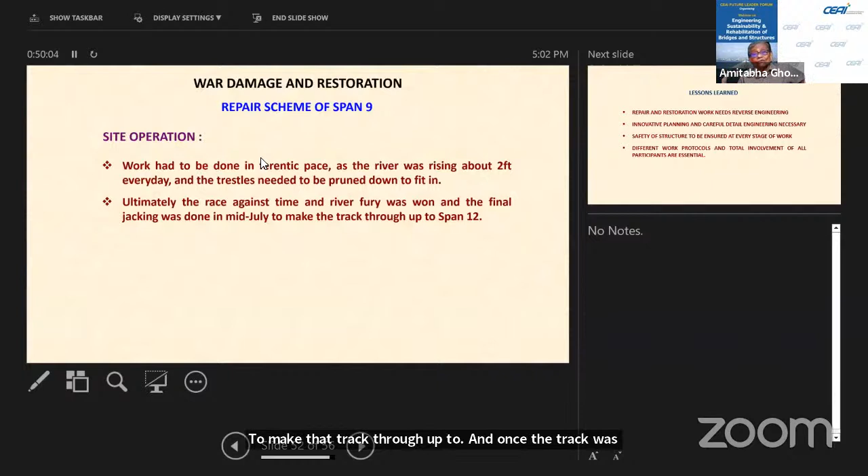Ultimately, we won the race against the river, and the final work was done in mid-July to make the track through up to span 12. Once the track was through and the new span brought in and put on span 12, traffic could be restored and the railway could run their trains with jute by the end of September, in October. It was one of the proudest moments of Indian engineering people at that time.

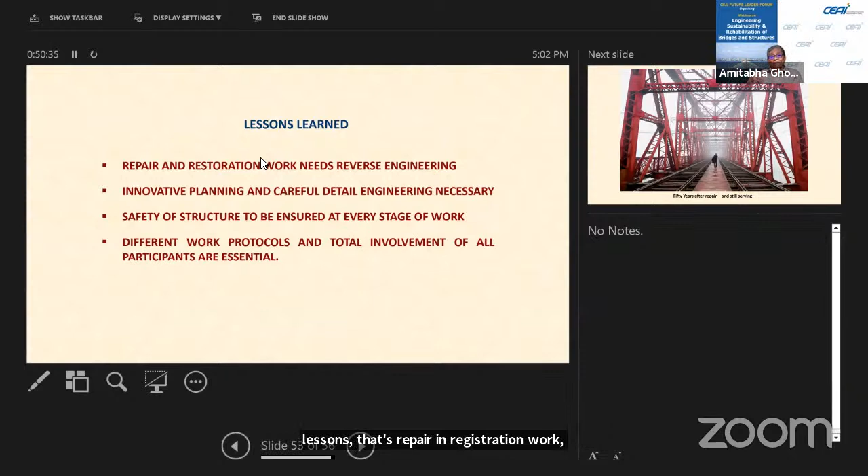Now, lessons learned: repair and restoration work needs reverse engineering. You have got to go back, understand how it was done, and then make innovative planning. The safety of structure has to be ensured, and people at every stage. It was in a risky condition when the bridge was hanging like that and you were pushing it up from the river. It could have collapsed any time, but one had to be very, very careful. Different work protocols had to be involved.

It was more of a social engineering. We had to make every worker put his best, and that is how this astounding work could be done.

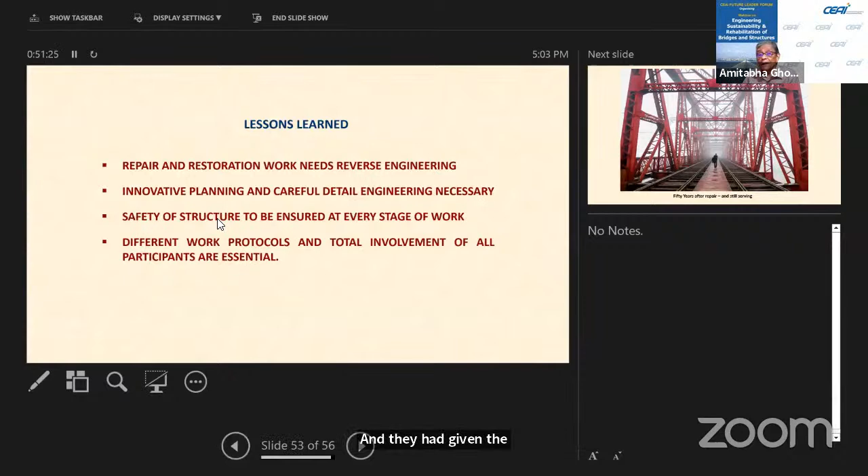It was acclaimed very well by the engineering community in UK and USA, both of whom had said that this repair work could not be done. They had given the verdict that there would be a failure. This is the condition of the bridge today.

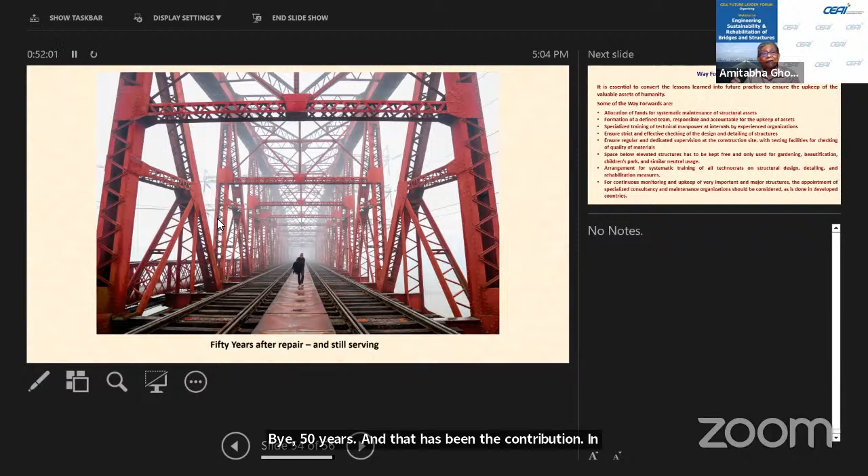I was invited to attend the 100th year of this bridge. Now it is 50 years after repair that the bridge is running, and twin track broad gauge trains are running across this bridge. So by doing this repair, we have deferred the new construction or major work by 50 years. That has been the contribution engineers can make towards sustainability.

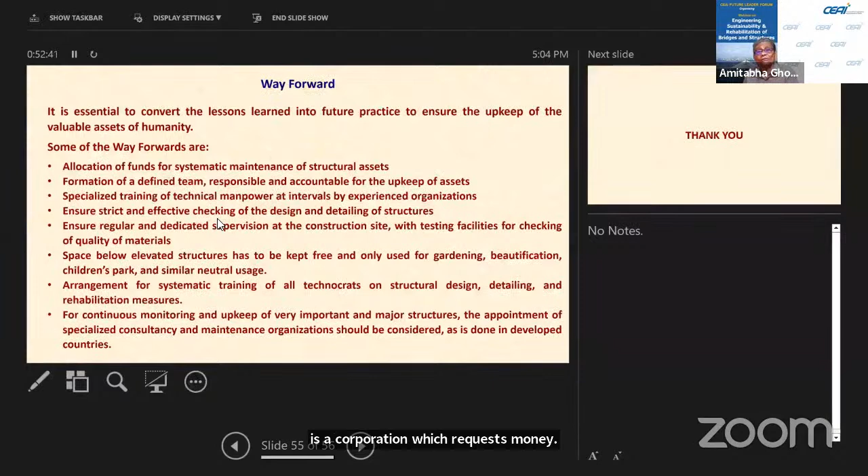So it is for us to take every repair work, keeping in mind how we can help the ultimate sustainability of structures, ultimate sustainability of our world. Now, these lessons through the three case studies that we have done, I have just tried to put together the way forward. First, the government and the people have to understand that maintenance is an operation which requires money. You must have budgeted money for maintenance, which no budget provides for. We provide budget for new construction, but we don't provide for maintenance.

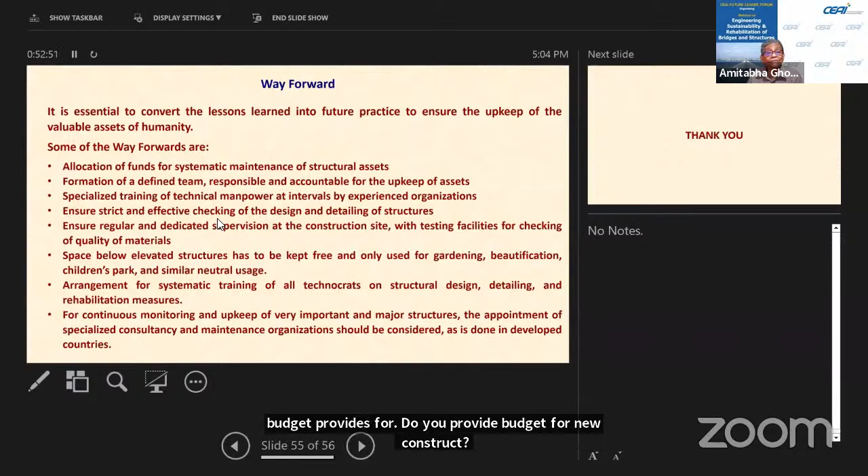Formation of a defined team who is responsible for maintenance, for upkeep of the asset, has to be done. And these are not engineering, but these are essential for engineering.

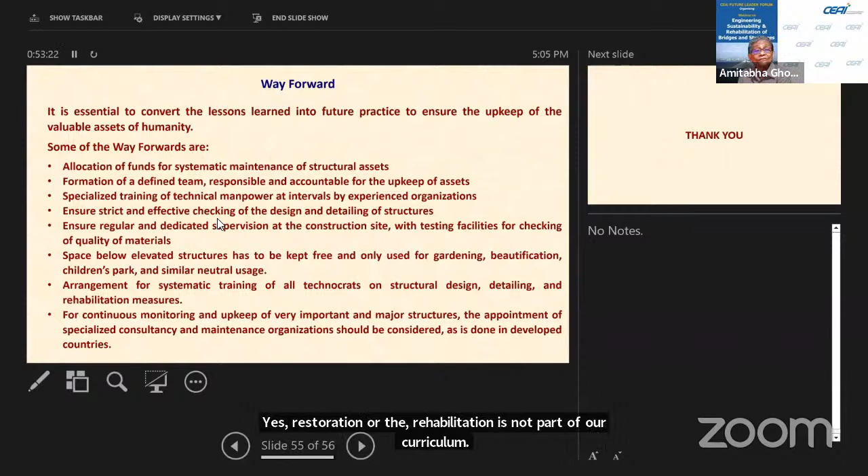Then the technical manpower has to have specialized training. Restoration is not taught in any engineering college. Restoration or rehabilitation is not part of our curricula. So one has got to learn from examples. We should have in colleges such case studies described to students, and the engineering cadre should have training in such work from time to time.

We must have strict and effective checking of the design and detailing of the structures, to ensure that they have been properly built, they are not poorly detailed, and they will not contribute to deterioration. There has to be regular and dedicated supervision at the construction site with testing facilities for checking of quality of material. This is where most of the mistakes are done.

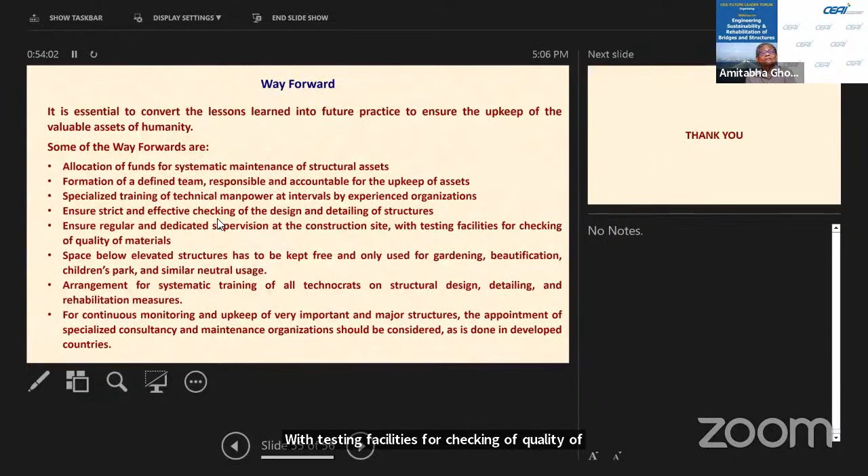Even the second Vivekananda bridge, while it was being built, during construction, it was found that the steel which had been imported was laminated. So the constructed cross girders had to be downloaded from the bridge. Now, ensure regular and dedicated supervision with testing facility.

Then the space below every elevated structure has to be kept free from people, free from plants, and should be used only for neutral use like gardening and beautification. There should be arrangement for systematic training of technocrats on structural design, detailing, and rehabilitation measures. And for continuous monitoring and upkeep of very important and major structures, one should consider appointment of specialized agencies.

In USA, they have firms like T.Y. Lin which looks after the Golden Gate Bridge. Steinman looks after the Brooklyn Bridge. Like that, the task is given.

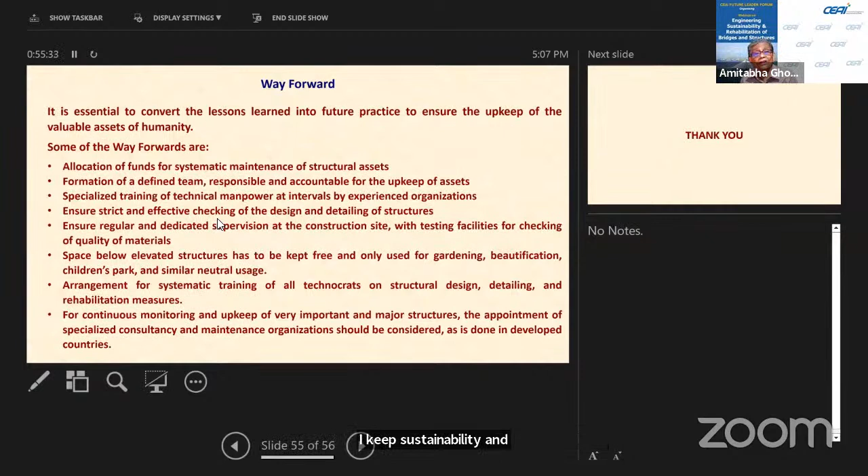Maintenance is a living task, not a spare casual task. That is most important. And I think only through that we can achieve sustainability and maintenance of our structures for longer periods. Of the three cases I mentioned, the first one, which has just been completed, we are all pretty sure that at least 10 years of its life has been extended.

The Howrah Bridge case, Howrah Station case, has already lived for 23 years, and maybe another 5 years it will live. And this bridge, the last I showed, has lived for 50 years. So this is our humble contribution towards sustainability.

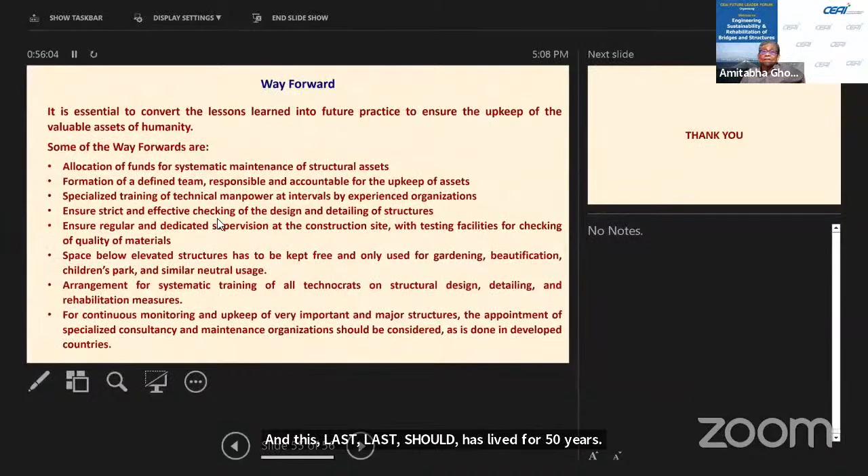And I would request all of you to keep this in mind whenever we inspect and repair the structure. Thank you very much.